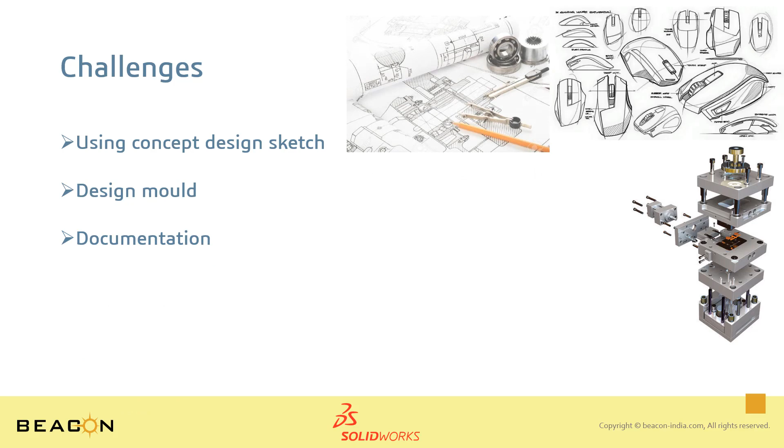Consumer product design industry faces many unique challenges, starting from converting concept sketch design to the part model, design mold, documentation, durability, sustainability, lastly creating aesthetically pleasing products. So let us see how SOLIDWORKS will help to tackle these challenges.

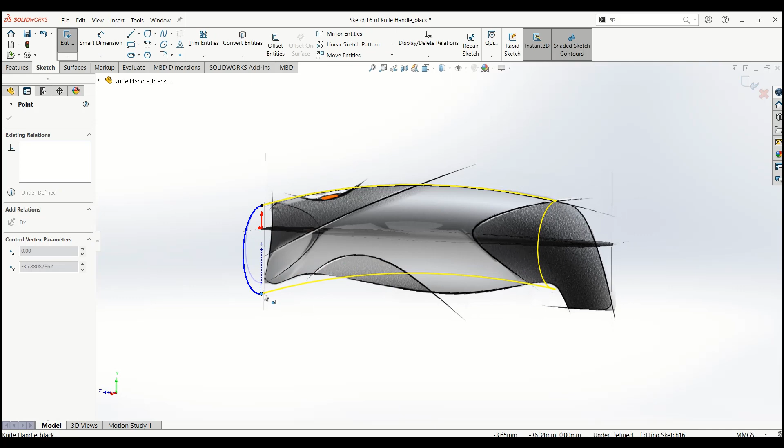It is possible to import napkin sketches in SOLIDWORKS, like you can see the knife handle images. Using an image as a guide, ensure your 3D model is true to the original design. Making use of symmetry will save half of the time.

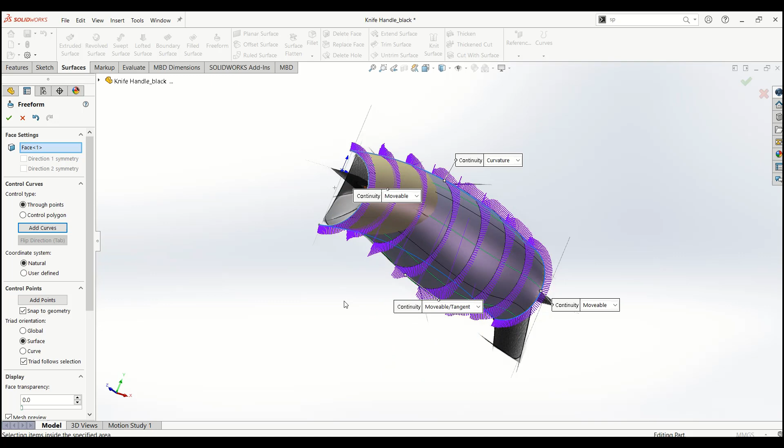Building complex geometry requires a comprehensive set of surface creation and editing tools, a sweep for example. To carry a belly shape along the knife handle, a nice fluid tool called Freeform can be used. The aesthetic design of the product is now completed. We can start to add some manufacturing details.

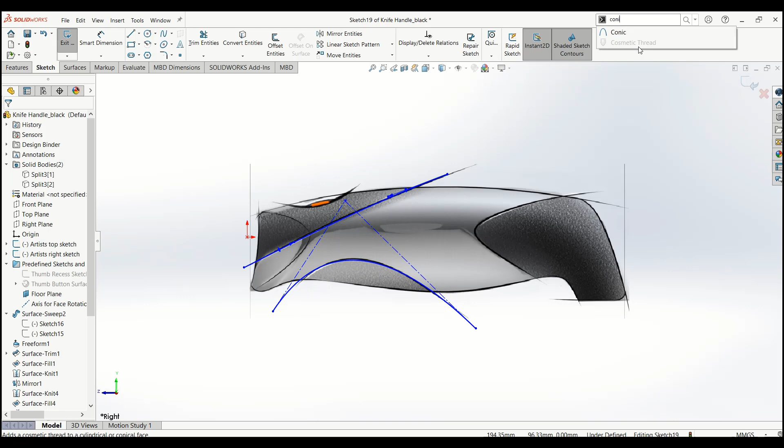This solid model of the design can be split into individual components and can be saved separately as a part. Style splines based on Bezier curves are a good option when it is important to have a smooth curve. And the conic tool lets you sketch conic curves driven by endpoints and rho values. Effortlessly drag and drop the appearance and find out how your model reacts or reflects the light.

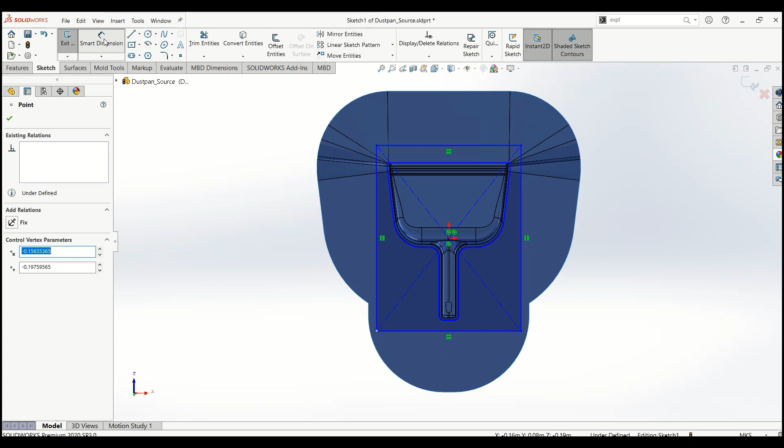SOLIDWORKS 3D CAD allows product designers and mold makers to easily amend their design at any stage from development to manufacture. We can use these mold tools to analyze and correct deficiencies with either SOLIDWORKS or imported models of parts to be molded. SOLIDWORKS offers comprehensive tools for design validation purposes.

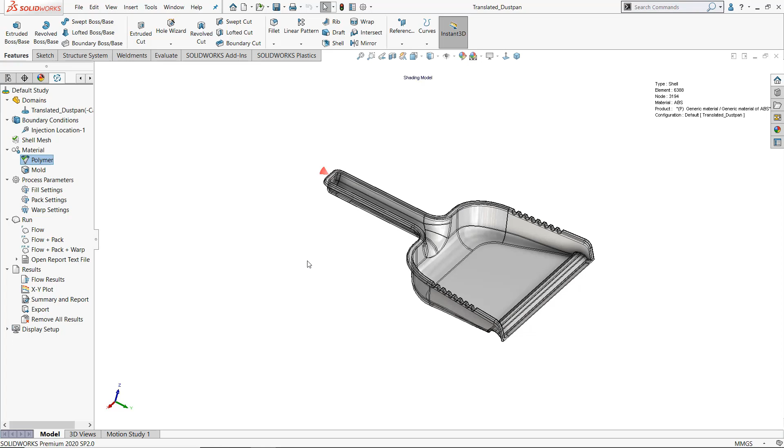Using SOLIDWORKS Plastics, analyzing the injection molding defects in plastic parts is much simpler. It's easy to define the injection location and polymer. SOLIDWORKS Plastics will calculate the plastic filling process to provide you the fill times, cooling time, sink marks, etc., thus enabling you to predict and avoid defects at a very early stage.

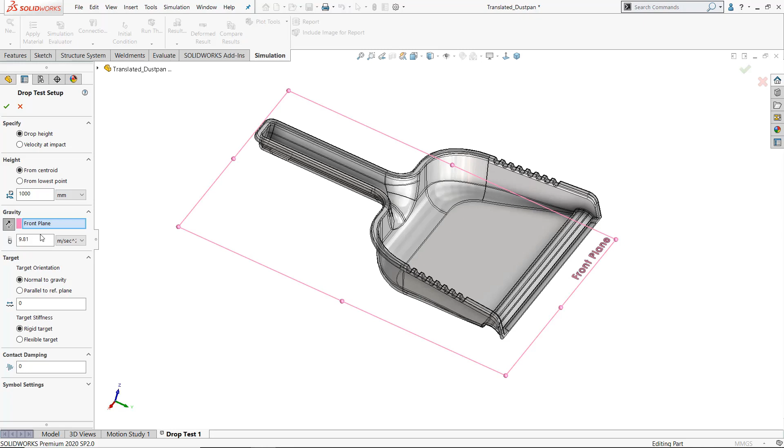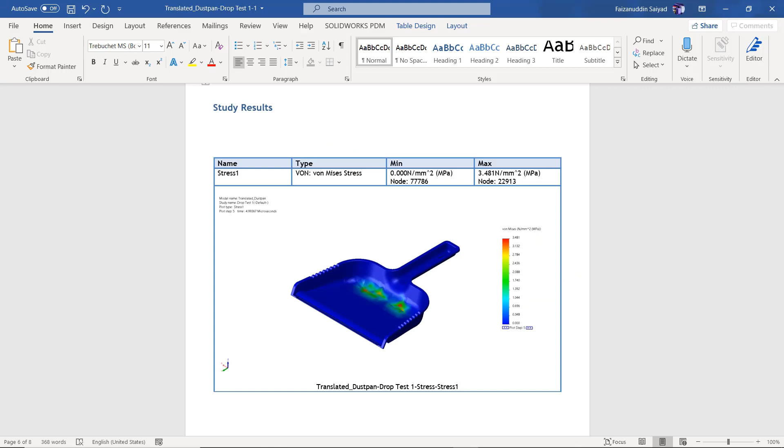SOLIDWORKS Simulation is an FEA tool using which we can solve complex physics of falling components using a drop test. Here in SOLIDWORKS, we can readily define the drop height and floor rigidity. SOLIDWORKS Simulation then solves the study to provide us with accurate results such as stress, displacement, etc. Also, these results can then be saved and shared as an animation video file, a Word document file, or an eDrawings file.

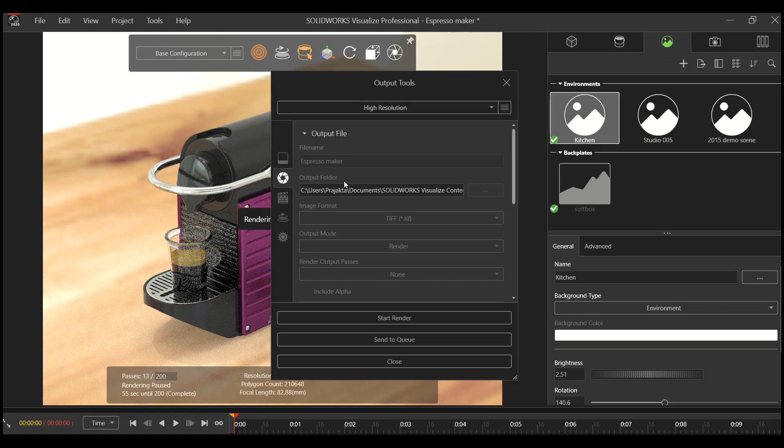Finally, visualization is crucial to convey your design ideas to end users. Having a realistic interactive display lets you try out many different materials and finishes and react to customer changes quickly before committing to the final design. Bring your product to life, create interactive VR when still images are not enough, and give your customers a more interactive experience with your products, increasing the chance to purchase.

Customers like Domotech Appliances and Coffee Day speed up their design, development and manufacturing process by utilizing every powerful functionality of SOLIDWORKS. This has changed the way people see their products.